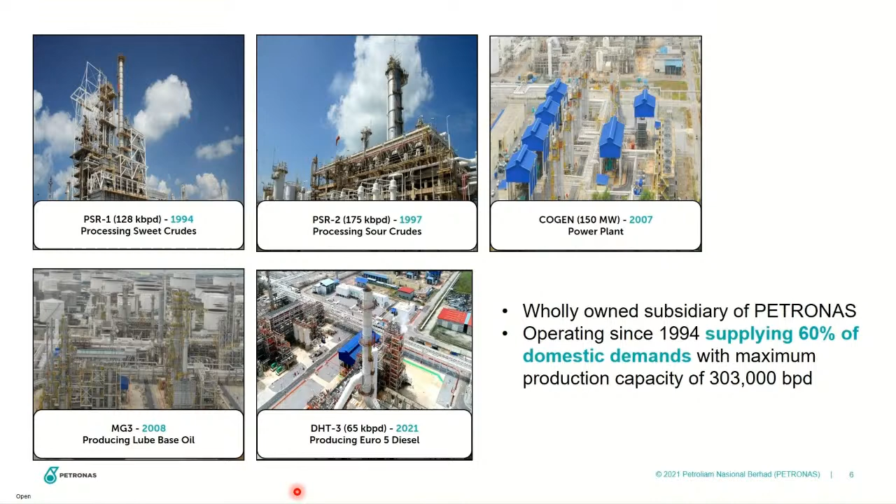The latest addition that we have in our complex is Diesel Hydrotreater Unit DHT3, which started commission this year specifically to process diesel Euro 5. These units are all interconnected and integrated between each other with shared common facilities such as hydrogen supply, fuel gas, utilities, and tanks. The movements of the hydrocarbon molecules across these units are continuous 24/7, and the movement also needs to be tracked.

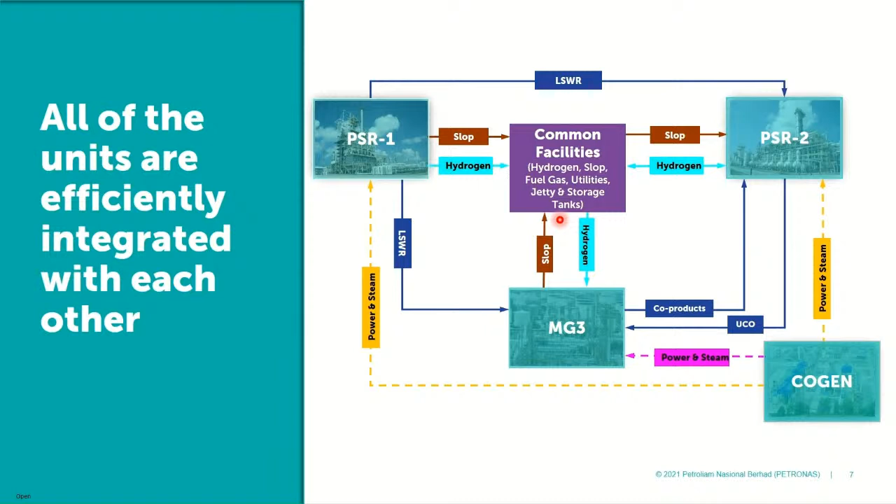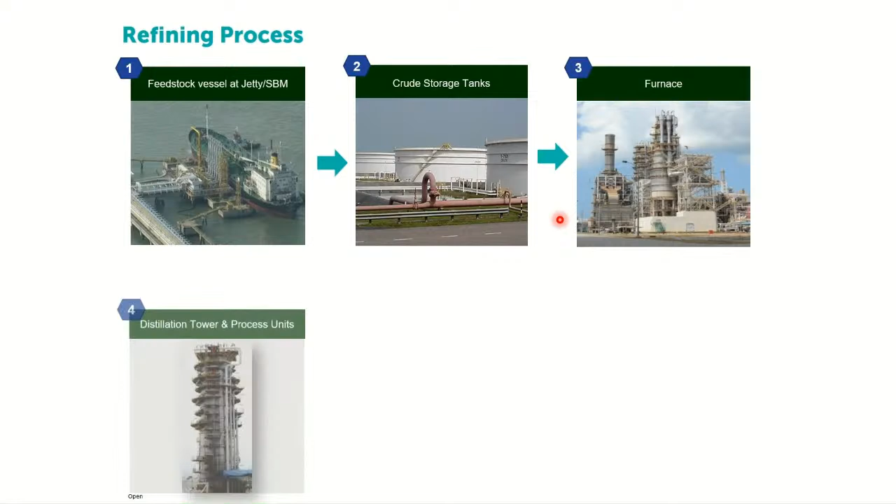So Sigmafine covers the boundary of our refining process starting from, first, the delivery of feedstock at jetty. Secondly, in and out movement of crude at tanks. Third, the movement of molecules from processing units into tanks. Next, in and out movement of final product tanks. And lastly, delivery of our products through the 3 modes of distribution, which are vessel, pipeline, and truck.

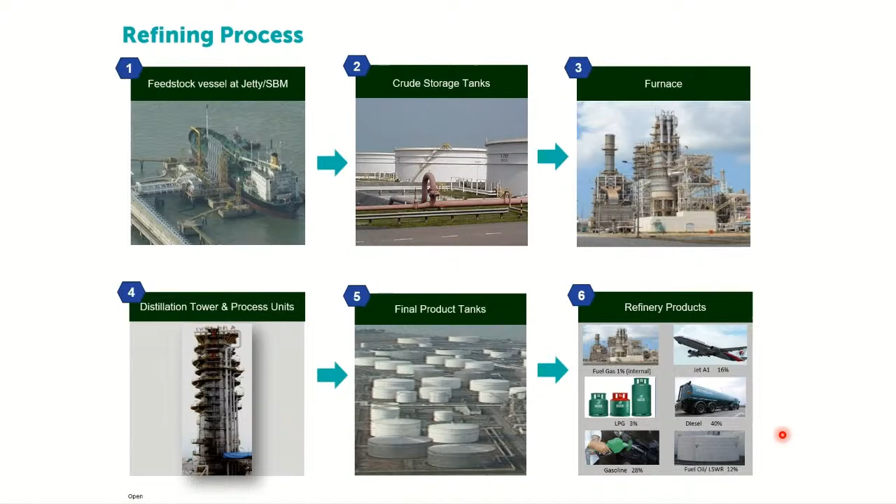In total, Sigmafine is able to provide reconciliation of 124 tank mass balance with an average number of 4,100 to 4,600 tank movements in 1 month. Now, moving on to the function of Sigmafine as a solution in helping our organization to improve our reliability of data ecosystem.

So before Sigmafine came into the picture, everything had to be configured manually through Excel spreadsheet. This definitely imposed difficulty when it came to balancing refinery data, as the hydrocarbon accounting team needed to rely on manual data entry and consolidation. And with manual input of data, the team also had difficulty in accessing historical data when needed. There was no systematic data architecture or system that was able to capture the data activity, tank inventory, and movements across the refinery units in real-time tracking. This also greatly increased the possibility of error.

Besides that, the team would face constraints in adhering to the deadline of our end-of-month account closure, which is on the third day of every month, from having to go through various sources of data. Therefore, this called for a seamless system that can act as a main platform to consolidate and collect all this data and can be accessed by the hydrocarbon accounting team. And this is where Sigmafine steps in to play its role by compiling and organizing data efficiently to allow simplicity for its end users in accessing data whenever and wherever.

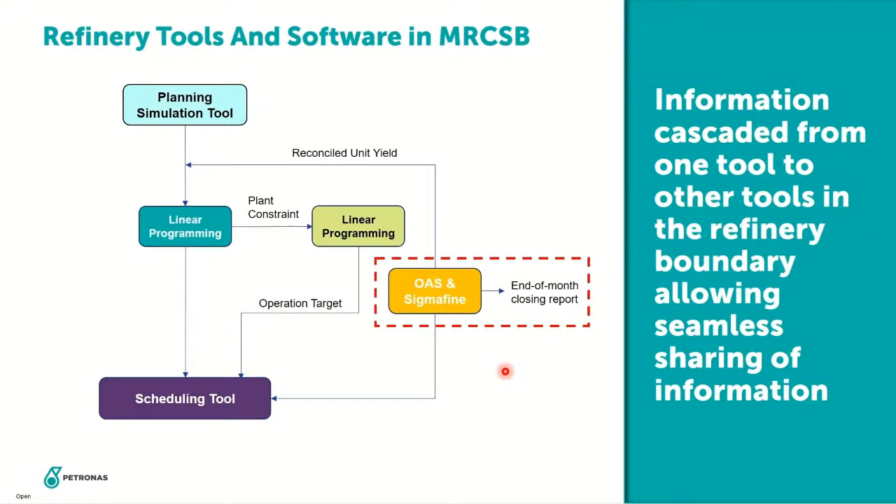So using Sigmafine, our user experience can be divided into two categories, which are daily and monthly. On a daily basis, we are able to produce two main reports, the mass balance and envelope reports. Through these reports, we track hydrocarbon movement across the multiple units in our refinery.

Secondly, we are also able to produce water draw reporting using Sigmafine by tracking the volume of water being drawn from our crude delivery. Through this monitoring, we are capable to detect if there is an unusual amount of water drawn, which may compromise the quality of our crude that will be used for processing.

On a monthly basis, we have the Inventory Movement Report, or IMR for short, which consists of monthly reporting of tank inventory to determine the performance of three main units in MRCSB. Lastly, we have the Unit Throughput Report, which is used for financial purposes.

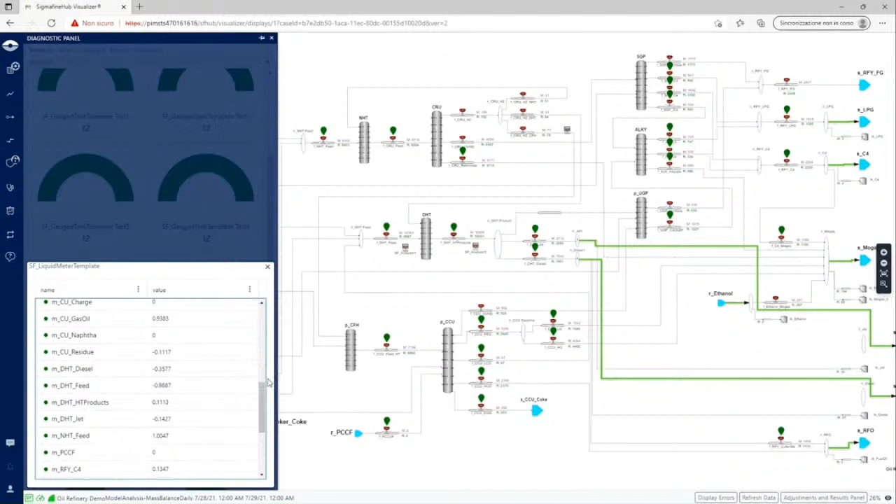It is not new that Sigmafine provides a set of statistical indicators that helps you in analyzing your data for the diagnostic. But then you have to dedicate some time in realizing where the issue is, which data is missing, and most important, how to solve. Thanks to the Sigmafine Hub web app, you have now the power to develop some logic through the usage of the Studio Analytic that supports your manual routines during all the process of data validation.

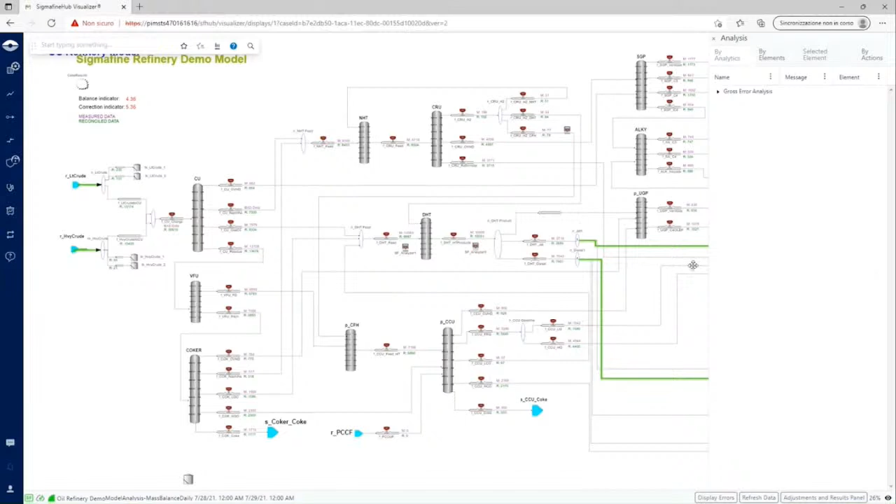Let's consider a very common situation that I'm pretty sure can sound familiar to you. It may happen that some measurements in your site, for many reasons, return 0 or bad data. Now, imagine how useful it can be to have your analytic that returns the list of these measurements along your model in a sort of interactive summary table, and then make a comparison with their values in the previous case, with no need to spend time in closing the current case, opening the previous one, and manually searching for the values you are interested in.

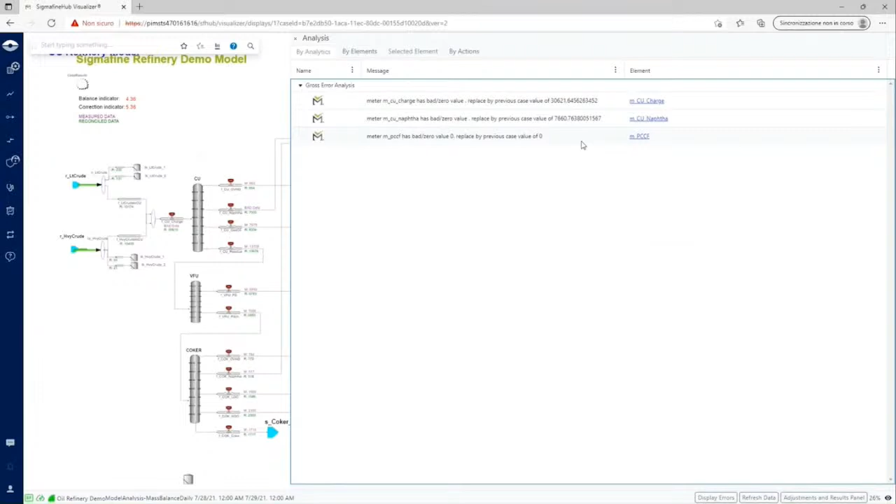Also, it would be incredibly advantageous to have some suggestions on the possible actions to take in order to solve the situation, for example, by adjusting the current value with the previous. And you can easily decide which actions to apply or not.

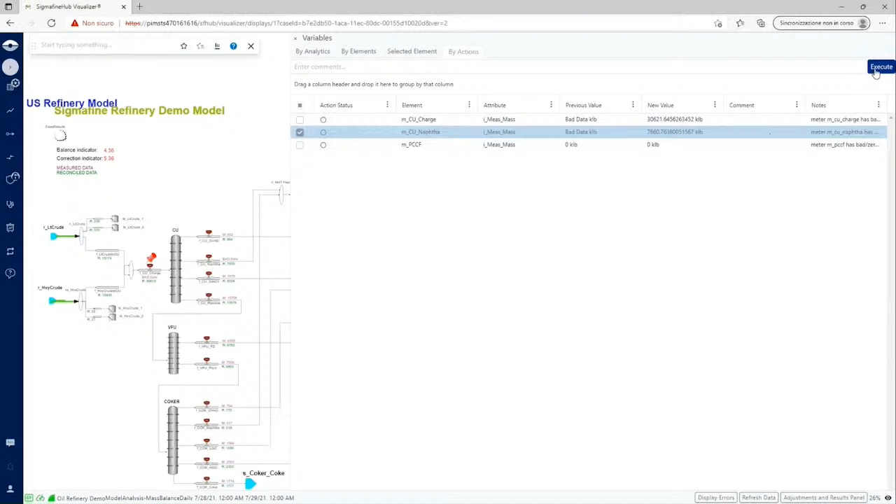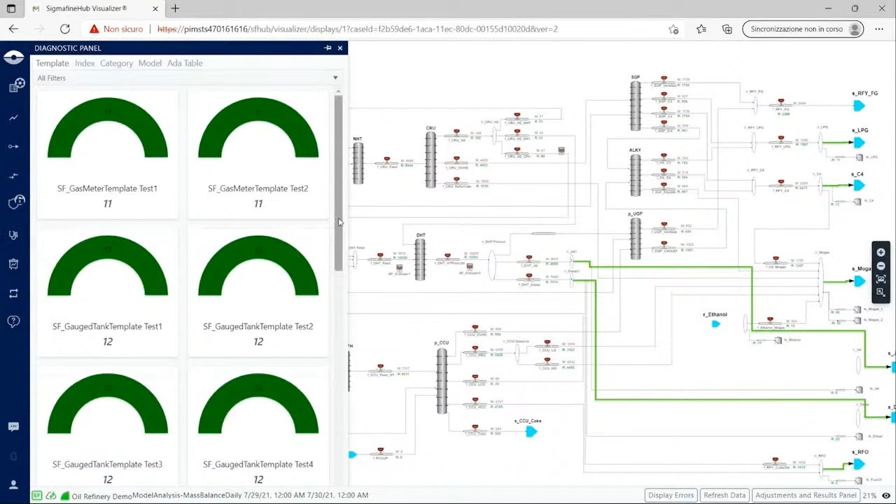Another common situation happens when you are analyzing your dataset and you notice a node, a tank, or process unit with a huge imbalance. You can start analyzing your data using the Diagnostic Panel inside the Sigmafine Hub. And here you have the overview of all the statistical indicators. You can see that there is already something related to the ethanol receipt area. The meter has a value of test 1 very high.

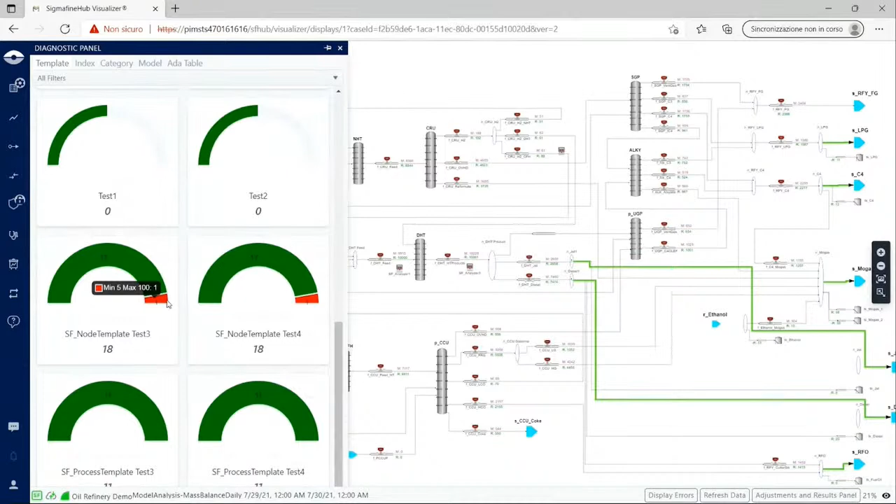This means that the correction applied by Sigmafine to the measured mass is very high with respect to the tolerance that you assign to your meter, as well as you can see the node has a test 3 very high, together with the test 4. These two indicators inform the users that maybe there is a problem in this area.

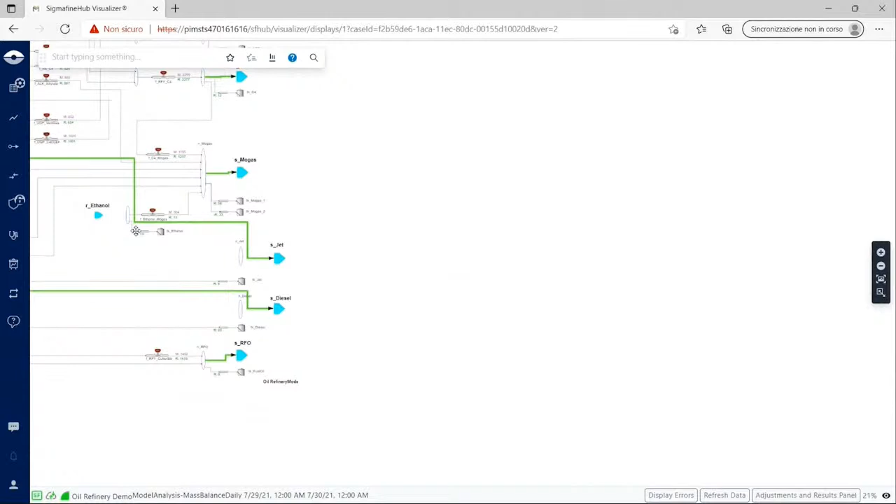But then with the Sigmafine Studio, you can easily decide not only to identify such imbalance points along your model, but also you can associate some suggestions. So you can have here the list of the imbalanced points that you have along your model. In this case, you notice that it's providing you the same information as the diagnostic gave you, but here, in addition, you can associate a suggested action.

So maybe, okay, it tells you that the node ethanol here is imbalanced, but it also tells you that probably there is a missing input transfer. And when you analyze the area, you can notice that a transfer is missing from the receive point to the node. Of course, this information can significantly reduce the time you spend on not only identifying the problem itself, but also the solution to adopt.

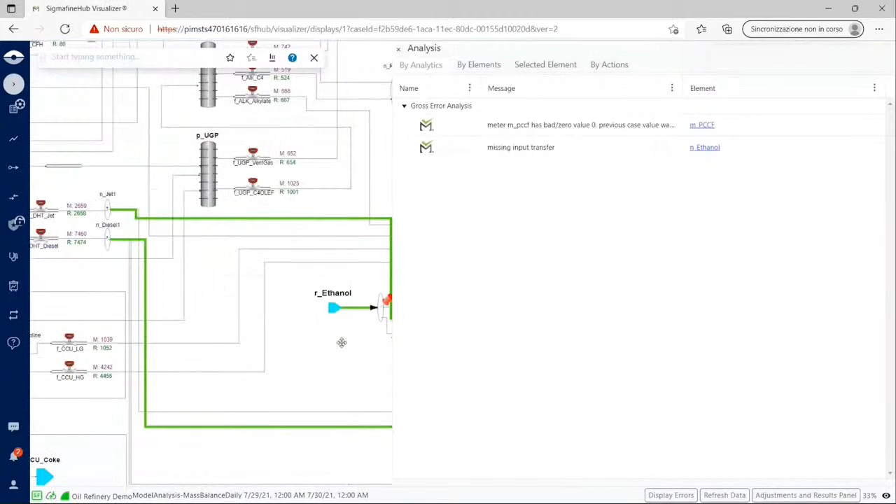In this case, if you click, you can create your missing transfer, putting the source, the destination. You can even add some attributes if you want, or you can just create it. Here it is. The new transfer is now available, also in the model. And now you can run again your case.

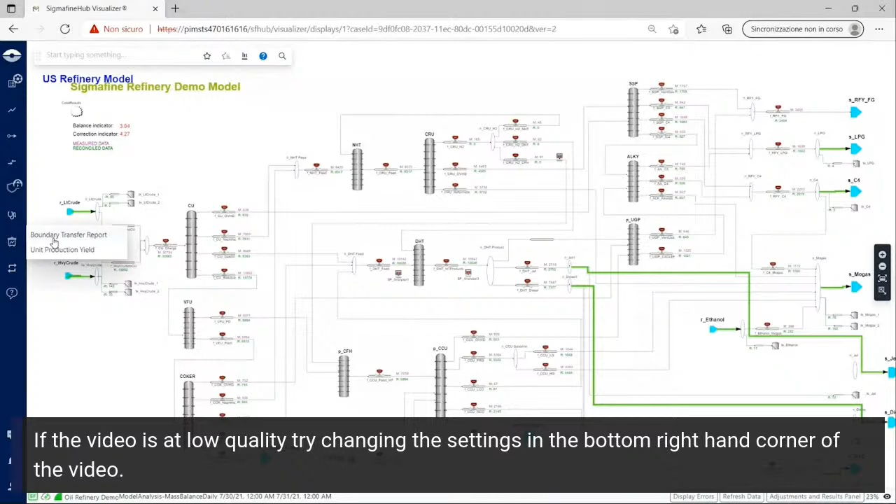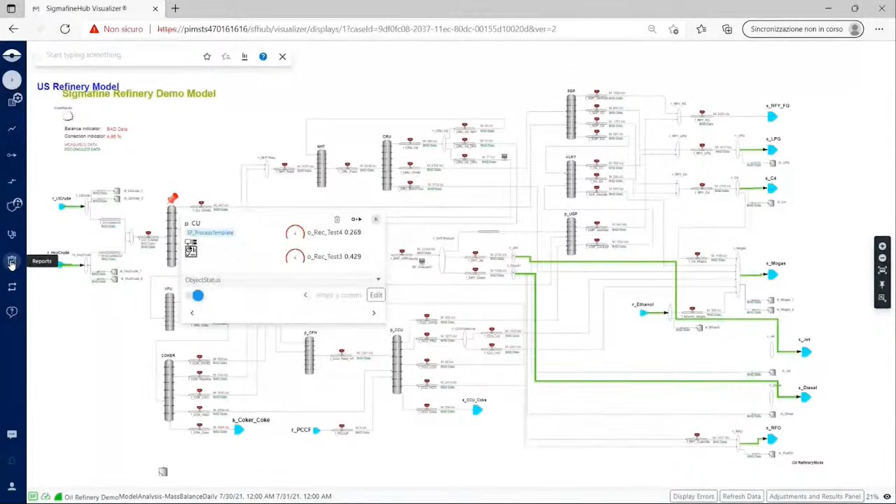Or also, you can monitor the unit production yield, both in tabular and graphical view, in such a way that you can investigate not only the production yield per each unit, simply by dragging and dropping the unit column, so that you can see per each unit the material produced in terms of produced amount, quantity, and yield in percentage, but also the overall productions per material in the graph that you can see here, together with the process unit where they came from.

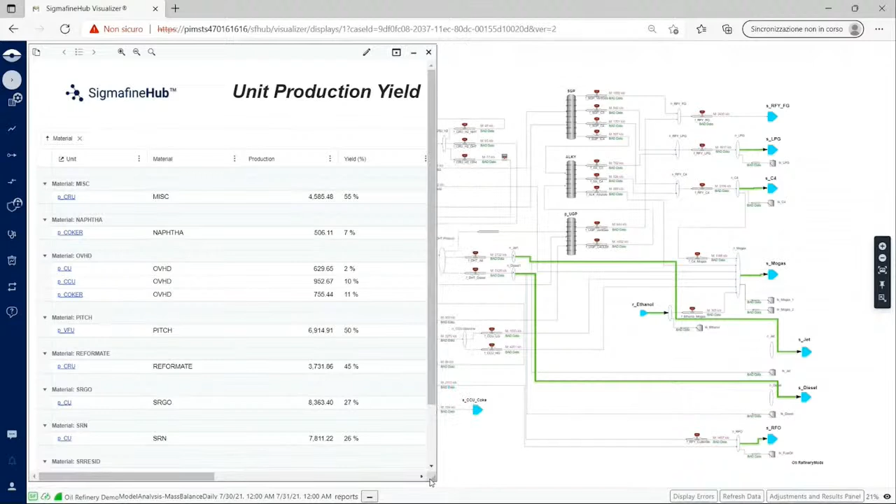For example, you can easily check that the overhead production is done by 3 different process units with their respective quantities. And you can access the same information also from here by grouping by material and searching for the material you are interested in. Furthermore, you can decide to go more in detail for the single unit and to select your desired unit and then open a more detailed view.

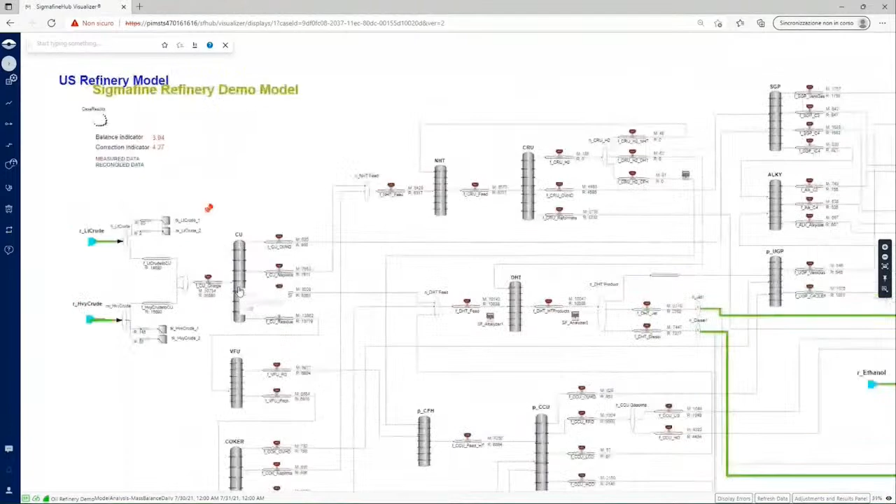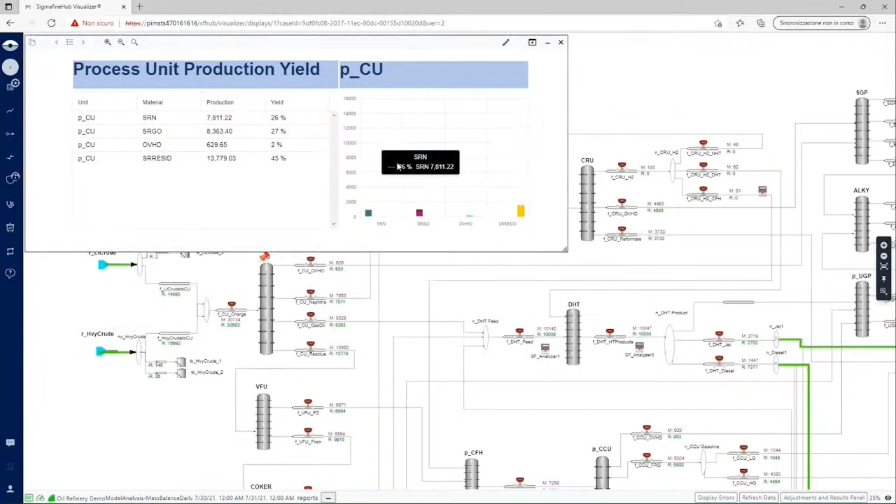And if you want to go more in detail with the unit production yield, you can even select the unit you are interested in and access the same information, but filtered only for the unit that you select, so that you can see here in graphical and in tabular view the yield of the crude unit referred to the material produced by the unit, their quantity, and their yield in percentage.

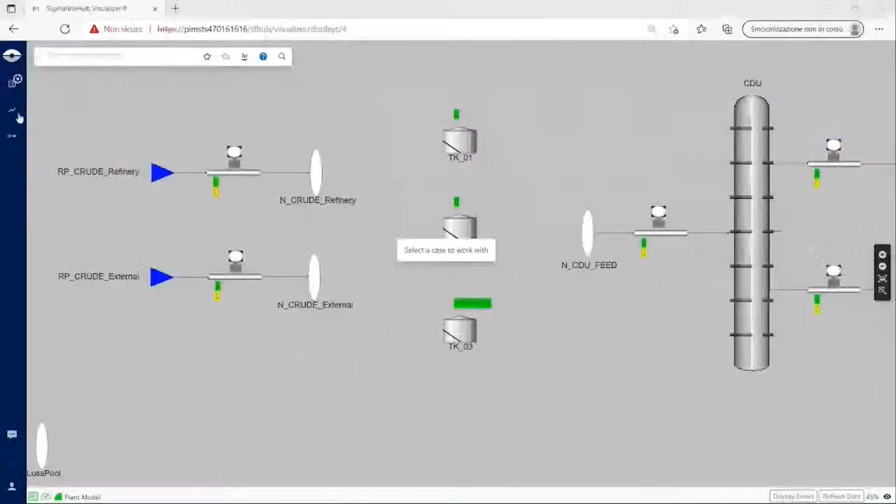Till now, I showed you examples that apply to the balance analysis. But of course, the Sigmafine Studio supports even more advanced calculations. For instance, let's consider a composition tracking analysis that calculates the material composition of tanks, nodes and transfers based on their initial composition and the movements that happen during the analysis time frame.

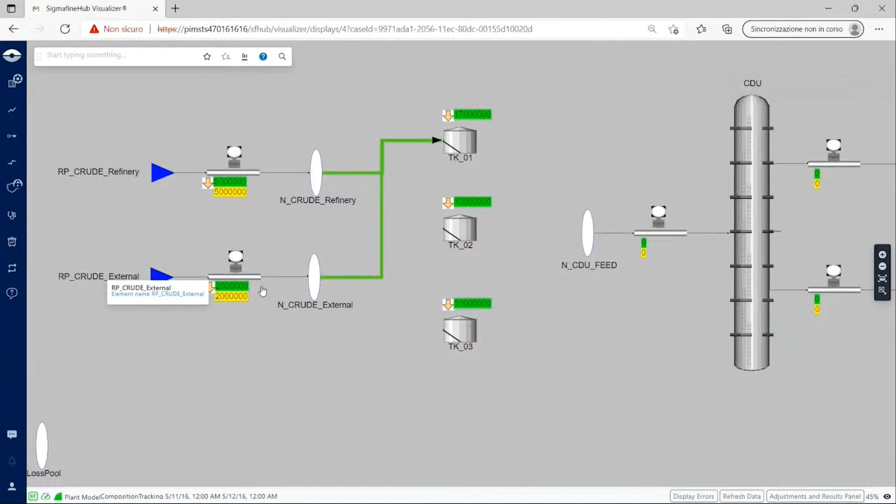Thanks to the Sigmafine Studio, you can create an effective way to visualize and analyze the composition data of an element, for example, this tank, together with the material balance data within the same interactive dashboard. So you can have a complete overview of both the balance and the material composition, in terms of what enters the tank, the transfers that enter, and the material detail. So at the end, you can access all this information, and the composition tracking table results are visualized through a pie graph that updates according to the selected elements.

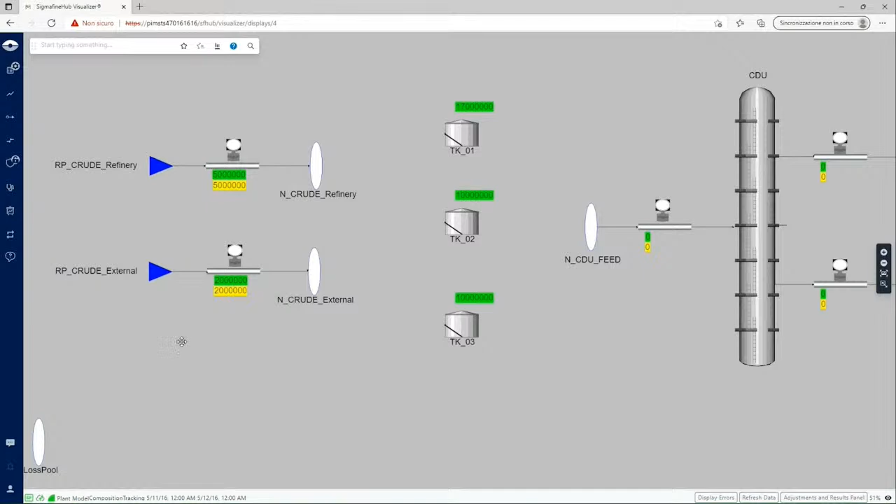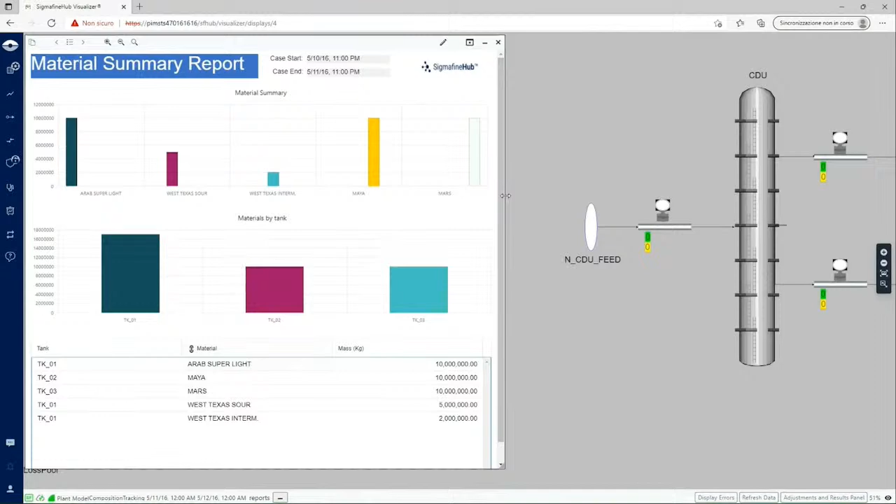It's really amazing what Sigmafine Studio is enabling. Elena showed us analytics that help users not only to root cause the problem, but even propose solutions. Interactive reports that provide insights on the assets and on the overall balance envelope. Dashboards that interpret complex datasets, such as contextualizing the results of composition tracking. And everything available at your fingertips without stepping out of the visualizer, so that you can immediately take actions, and that is really awesome. But there is more.

I'm pretty sure, whilst looking at the demo, that in your mind you were already thinking about what you could do if Studio were available in your Sigmafine environment right now. Well, you could say, I could create the refinery loss report. I could see all the metal grades of each stockpile all at once. I could compare in one table the LNG production of all my trains.

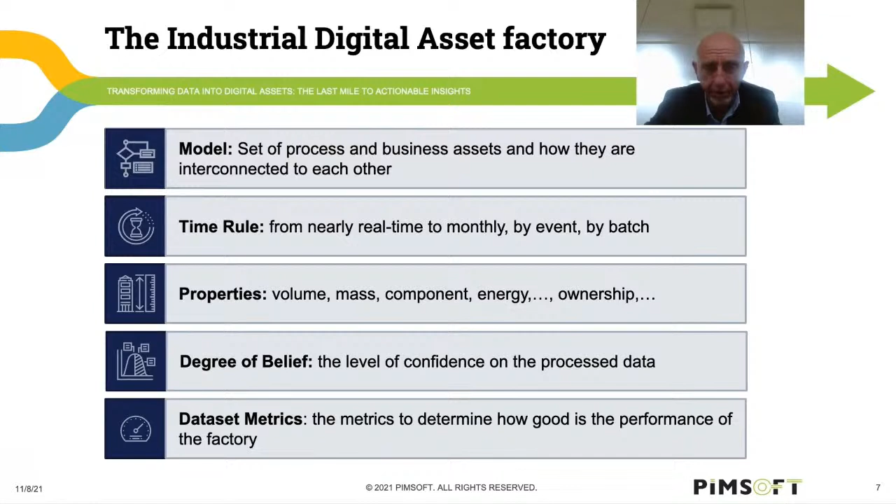So in order to process our data, we need to implement and execute a certain set of data operations. And some of them are quite simple and intuitive, like filtering bad data, validating the data against certain criteria, and then maybe we would like to also implement certain rules to replace and substitute such data with alternate values like design data or recommended data.

Then we have to reconcile such data according to the constraints, the principles and the properties we selected. So we may want to reconcile based on mass and energy, and we may want to apply this constraint on different envelopes. And the result of the reconciliation will be to obtain a first level of dataset able to close the balance around the envelopes we selected.

And then also thanks to that reconciliation, we can even infer data we were not able to measure because of lack of instrumentation in the field, or because certain data was not actually possible to measure. And finally, based on this dataset, we may want to build some tracking capabilities in order to track properties like composition or, as we said, ownership.

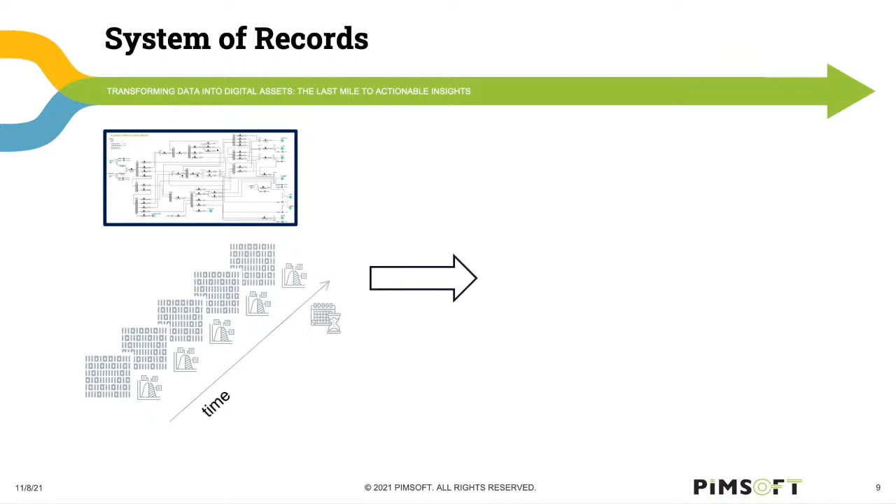The execution of the data transformation steps around the model generates over time the sequence of industrial datasets together with their metrics. This is what has been defined as the single version of the truth. We prefer to refer to it as the system of record of the company, embedding the accurate description of the properties related to the company assets over time.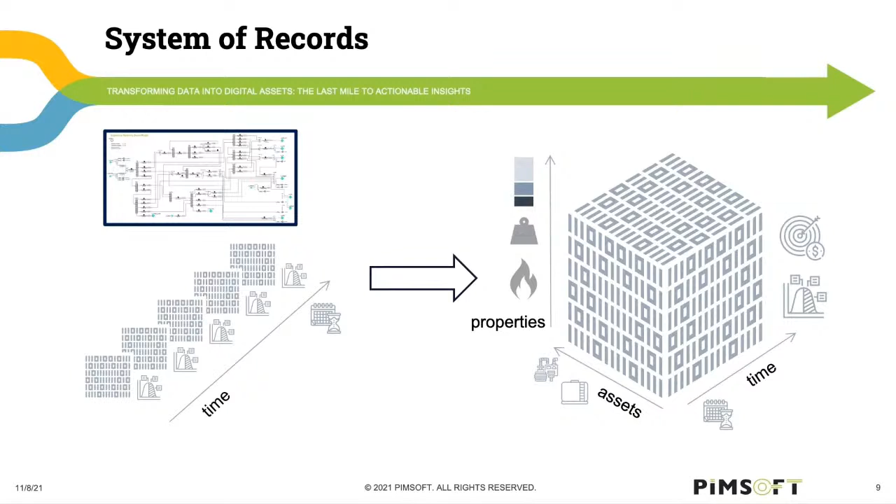The last step of the data transformation journey is about shaping. Most consumers will not be able to digest the dataset as it is. So our factory needs to be able to shape and augment the dataset in order for it to be consumed by different actors. Many scenarios see Sigmafine feeding finance with generated production and consumption data to move ERP stocks,

sending yield reconciled data back to scheduling, preparing a compliance report for tax and environmental authorities, and finally, more in general, reshaping the dataset to be consumed by the advanced analytics and machine learning application layer. In all cases, it is extremely relevant to provide a metric certifying that the level of reliability of the dataset is good enough.

Being able to measure the industrial dataset means being able to certify the reliability of the data delivered to the different consumers. It is also a means to keep our digital asset factory under control. Sigmafine produces a certain set of indicators. Some of them are related to the model, others are related to the points of measurement and points of balance within the model itself. They segment the performance of the factory across different perspectives. You can see we have redundancy, imbalances, correction, solvability, and so on.

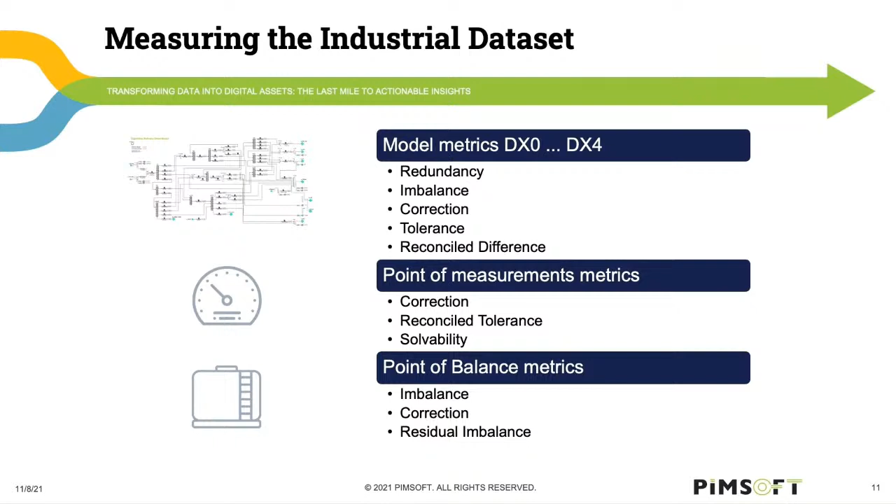A first example of model metrics is coming from MOL. MOL is an integrated oil and gas corporation. They are tracking and historicizing the Sigmafine generated model metrics in their PI system. In such a way, they can track historically the performance of their industrial dataset factory, and they can assess how modifications to the models or improvements in the measurement base can affect the performance of the Sigmafine process.

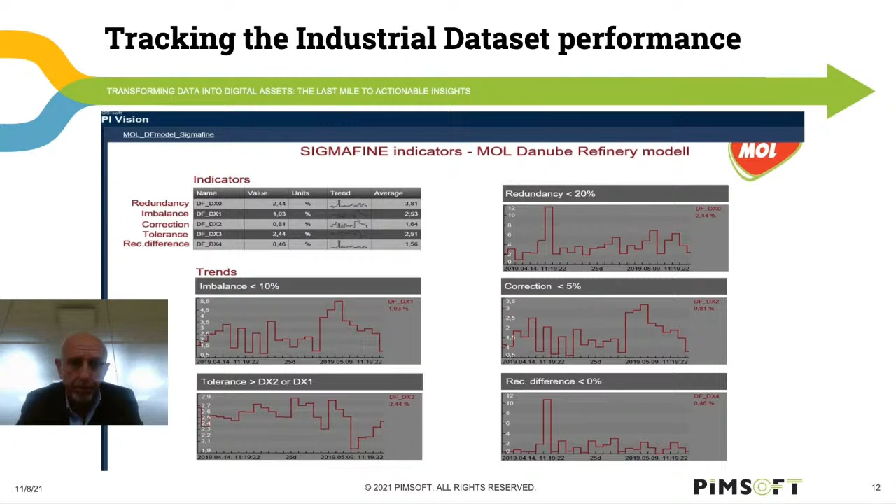Another example of usage of such indicators is coming from Slovnaft, a large refinery located in Slovakia. Slovnaft is tracking Sigmafine test 1 values. Those are the indicators related to the correction applied to the points of measurement in the model. And by monitoring this correction indicator, they are able to identify suspicious meters, and so even trigger a maintenance action to the maintenance department.

So we have discussed how to manage and measure industrial digital assets, and now we'll go through monetization. Infonomics defines monetization according to two main categories, indirect and direct. Indirect monetization refers to the internal usage of digital assets in order to drive better business, process, and organizational decision-making, which ultimately drive better economics. This could be the case, for example, of advanced analytics, optimizing certain internal processes based on reliable datasets.

Instead, direct monetization refers to the exchange of digital assets with external entities or consumers as the base to obtain an economic return or avoid a financial loss. But let's map this concept to the industrial digital asset context. With regards to external monetization, we have several cases where Sigmafine-generated datasets are used in the relationship with third parties. This is done, for example, in compliance, whenever validated datasets are required by tax and environmental authorities.

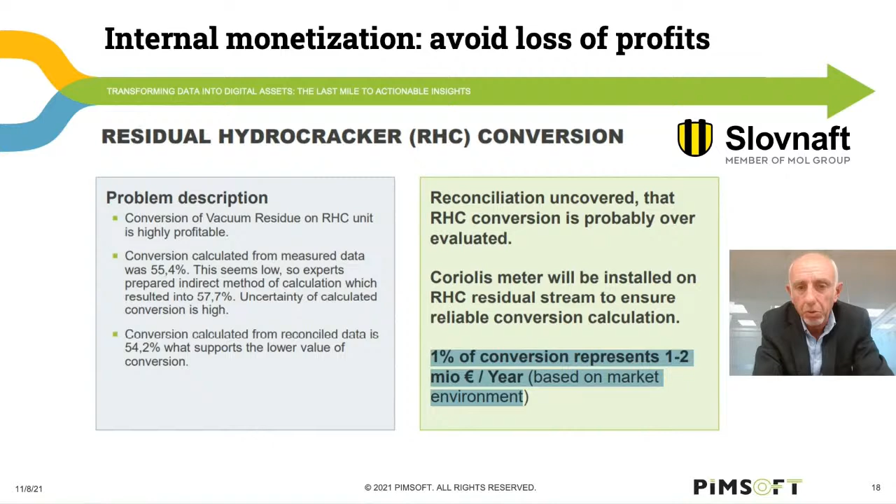We went through the process of managing, measuring, and monetizing industrial digital assets. In Pimsoft, we believe Sigmafine Hub is the foundation to elevate such process to be a well-controlled industrial dataset factory. And among the different system capabilities added by Sigmafine Hub, I would like to underline the ones I believe are the most impacting. First of all, Sigmafine Hub introduces the capability to augment the knowledge of the system itself. It is possible, therefore, to add specific rules and behaviors to build a shared company data management practice.

Second, we learned from our customers that this process is the result of a team effort, where different roles cooperate. So improved collaboration supports the capability to communicate and share data and actions among the different members of the team.

Also, Sigmafine Hub provides an enhanced workflow management where to configure the data transformation and shaping steps specific to your company. And finally, the auditing capabilities have been enhanced to span both changes to the data and changes to the configuration to be tracked and available for both internal and external audits.

We want to demonstrate the interoperability of Sigmafine Hub applications, which is their ability to use the same features available from the visualizer display, even using a different data rendering mechanism, which in our case is a report. Here you can see a display which also has a report that I have activated from the command bar of the visualizer. The report shows the meters test 1 performance indicator, providing a graphical and tabular view of our information, allowing us to interact with the display.

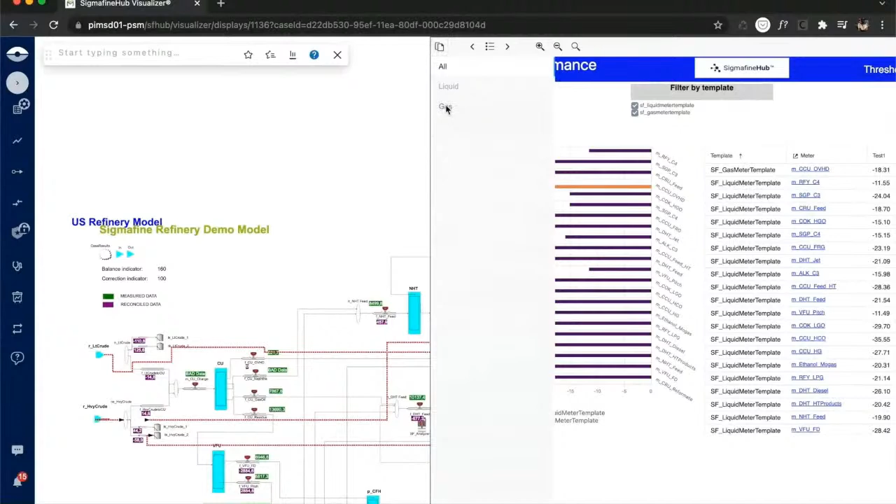The report gives us standard filtering options on the meter template, as well as the possibility to organize our data into multiple pages. Using only the report, we have all the full options, such as navigating on the display elements, viewing information contained in their attributes, and even more, we can adjust attribute values through the attribute panel.

The Sigmafine case runner is also available to run the reconciliation. As you can see, as a result of changes on the Sigmafine case, the report data is not valid. The notification message is reminding me that I must refresh the data. In future releases, a setting will be made available to allow automatic data updating.

To wrap things up, we can say that with Sigmafine Hub, we have the advantage of being able to work using our preferred approach without losing the functions that are available on the system, as well as exploiting the interoperability between the applications themselves. But how easy is it to use the new applications? Let's see in this second video.

The scope of this video is to demonstrate how easy it is to modify a report or a dashboard, taking advantage of the integration between the report and the report editor, allowing us to make the desired changes and immediately evaluate the results. By opening a report from the visualizer, we can activate the report editor to make graphical changes. The report editor opens, and then we can modify the report by adding a new content that is a data grid, and then assign a data source from which to pull the data.

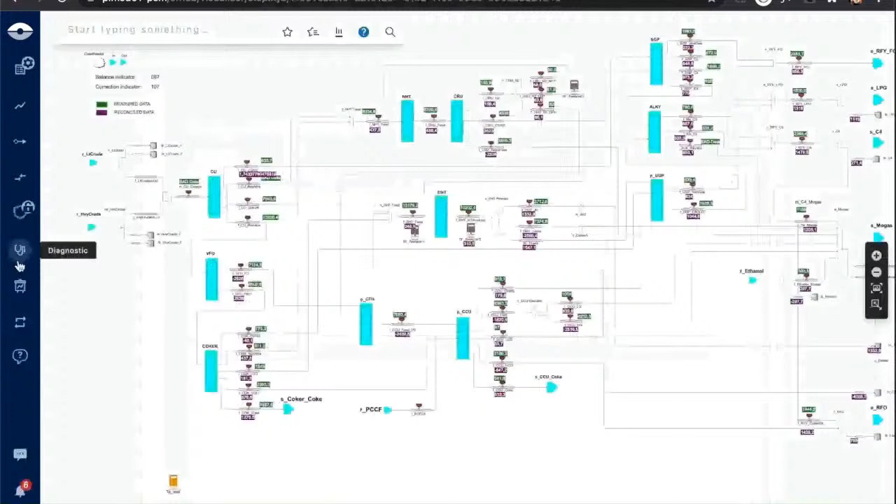Finally, we create a relation between the data grid and the chart using the material in order to set up an animation when the users click on a material code. As a final step, we have to save the report by assigning a name. In order to make our report available in the Visualizer application, we need to configure the new report in our display settings. As you can see, the report is now available in the Visualizer command bar, and we can open it to see our material stock.

So far it looks good, but what's next? Let's look 1 year ahead and see the next evolution of the SF Hub platform. End of next year, we expect to extend Visualizer web app with authoring capabilities and to release one new major feature, Studio Workflow. The introduction of authoring will allow to create and modify displays in a synchronized way with the database, allowing users to discontinue ProcessBook, the current authoring tool. Remember, discontinuing ProcessBook is not a requirement but an option.

The introduction of authoring will also require the deployment of a first version of a new service, SF Hub Server. The service will master and coordinate access to authoring resources and to the database. But there is more. By the end of 2022, early 2023, the release of a new Studio component, the Workflow, is also planned. Workflow introduces a new way to use and work with Sigmafine, moving from an application-centric to a process-centric approach, transforming Sigmafine from a set of independent applications to a documented, coordinated, and audited bus of applications and services.

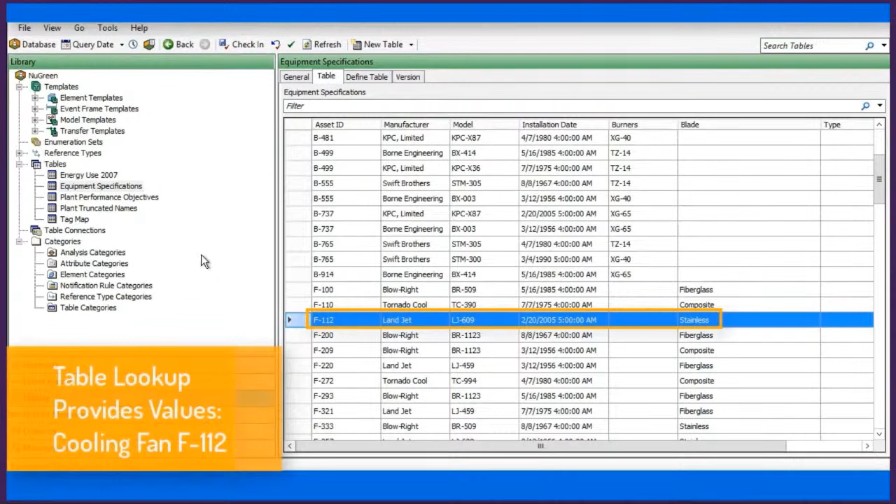It's also easy to create tables with your asset metadata. And AF can import and link with tables you already maintain to ensure all asset metadata is kept up to date. Grouping all asset data together creates a holistic view of your PI System, while eliminating issues with finding your data through esoteric tag naming conventions. Okay, we organize our assets. What else can we do?

Arguably the most powerful feature of Asset Framework is the ability to create templates. Making a cookie-cutter model for repeatable assets makes it incredibly easy to scale. Scaling is essential while your company is adding equipment like a new turbine at a plant, creating another production line, or adding an entirely new site, as you need to easily standardize your operations. Templates will streamline the build-out of your existing or new systems, and as you get more advanced with template design, you'll be able to create layouts that can apply to several types of equipment, or even model out your entire process from start to finish.

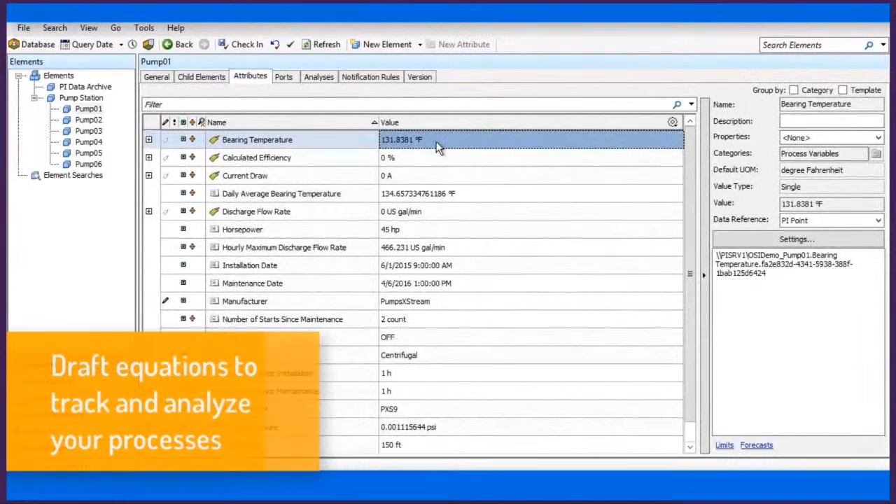Once you've organized your assets in an intuitive way, it's time to get more out of your PI points. Explore and manipulate your data with our Asset Analytics engine built into AF. Configure predictive models to set targets for your processes, write equations to increase your understanding, or compare roll-up analyses to investigate which equipment or site is succeeding more than the rest. Leverage your metadata to see trends you may not have had insight into before. The possibilities are endless and configuration is straightforward.

Yet another addition to Asset Framework's suite of features is the ability to capture events that happen throughout your operations and notify your personnel when necessary. Event frames allow you to track individual shifts, batches, or process excursions, while notifications can alert an engineer prior to a failure or be used to send out a summary report on a scheduled basis.

Tracking events is crucial to optimizing your process and will help to identify areas to improve your production. Notifications make sure you don't need to worry about your operations, since PI will be able to communicate any problems to you and your team the second things are out of place.

With Asset Framework, you're gearing up for the full extent of the PI System. Many of our visualization and data shaping tools leverage Asset Framework to give you better intuition about your data. PI Vision, PI DataLink, PI ProcessBook, and our PI Integrators rely on AF to provide you with a simple and intuitive way to interact with your processes.

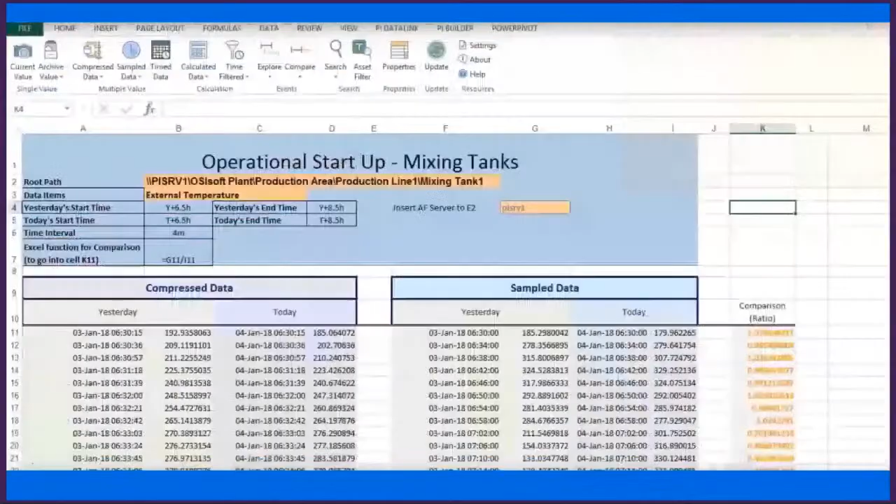Live troubleshooting, writing repeatable reports, or sifting through huge amounts of data becomes much simpler with Asset Framework as your backbone. Additionally, AF provides a whole new way for you as developers to interact with PI. We encourage you to leverage the AF SDK to build applications that fit your needs.

Asset Framework organizes your data and metadata, helps you scale, analyze, and track your processes, and provides you with an intuitive window into your operations. Asset Framework is the key to unlocking the full value of your PI System.

I believe now you have seen the main capabilities of the PI Server and especially the PI Asset Framework. Every one of our customers has access to all of these features within the PI Server without having to pay more. We don't sell these capabilities separately, and therefore with just one purchase, you can start working with them right away.

For the third layer, it is about delivering data to users. We have out-of-the-box tools that are easy to use. You don't need any programming skill for any of these tools. You have seen a sneak peek in the video just now, but let's talk a little bit more about them.

First, we have PI Vision, a web-based application that allows users to build dashboards and view them from any device. With web access, a field operator can see real-time updates even when they work outside of the business network. Also, PI Vision is so easy to use that you don't even need to see the manual to start using it.

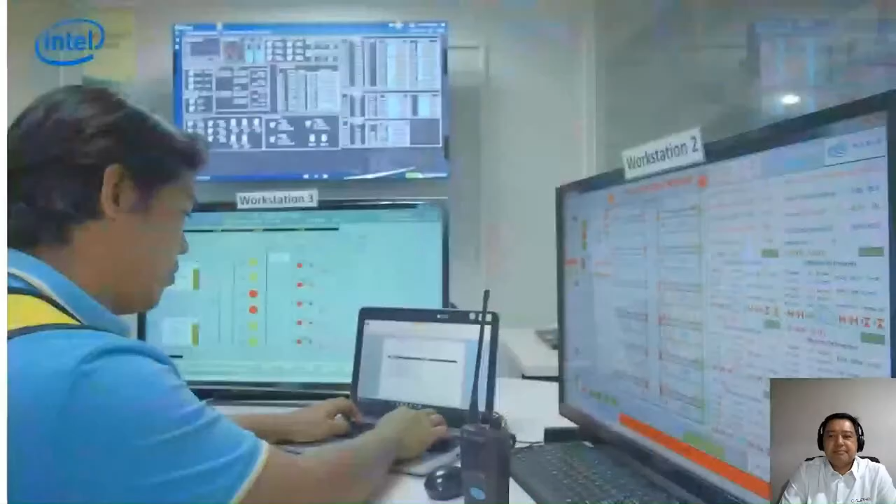The solution improved Maynilad's business by giving them an overall look into their entire operations. So if they had 20 to 25 systems before, they have just one monitoring system today, and that's the OSIsoft PI System. The solution deployed follows the pillars of IoT: collect, analyze, and act on it. At the heart of it is a data historian, which is a real-time series database. We also have an advanced analytics engine that we use to churn out valuable insight for proactive maintenance. We also create displays for them that follow them on any modern web browser, from desktop, phone, and tablet.

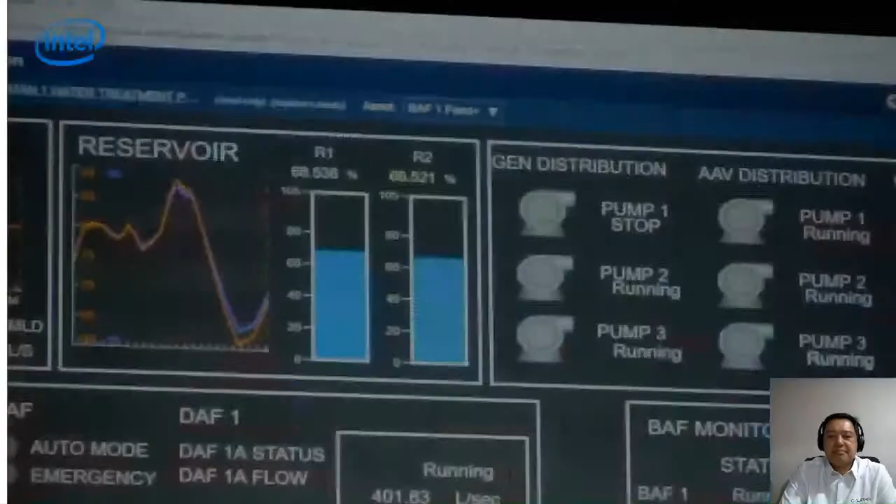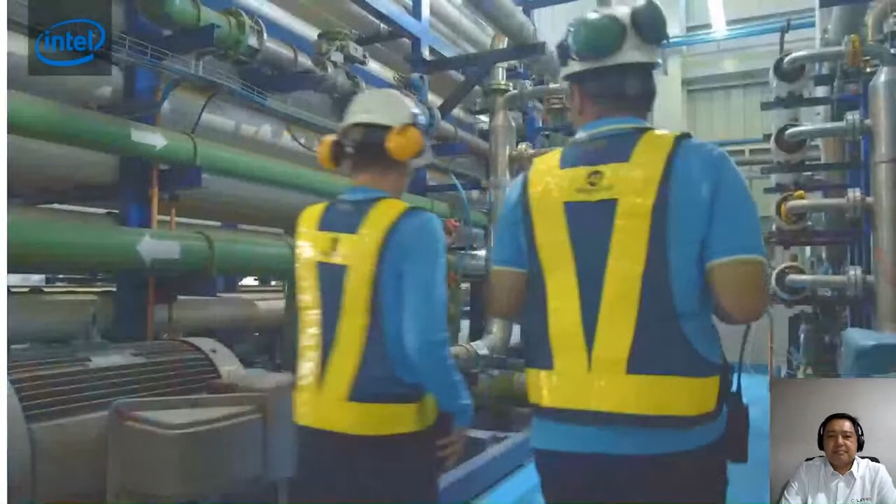Calibr8, we've been working with them from the very start on our IoT platform. They have the technical experience in order to implement, which can be displayed in the central control room. That allows us to be very flexible and to react very fast to disturbances that occur in our network or changing patterns in terms of consumption of water. For example, if there's an area with low water pressure, they can actually ramp up an alternative facility in order to service that area. So those are the kind of things that have benefited Maynilad.

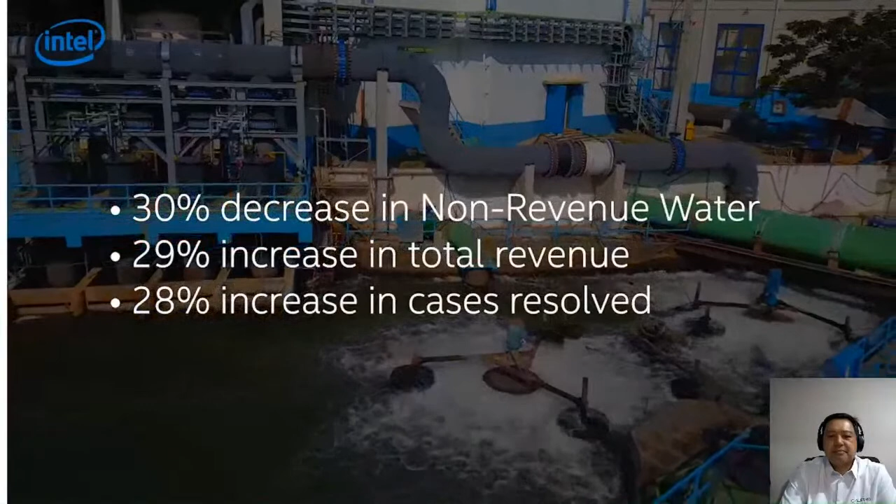So, how do we start? Where do we start? Or what to do first? Those are the common questions that I get from our clients. We work with them. Let's get the data first. Reconcile all the data. Let's optimize. Because if we have a complete set of data, and if we can have that reconciliation of data, then we can quickly optimize. And optimization really means quick wins. And for us, everything starts with data. There should be no excuse in getting that data.

We connect to whatever we can connect to, like PLCs, sensors, and control systems. We collect data from manual loggers, Excel, Google Sheets. We even convert PDF files directly to PI Data Archive, SMS and email to PI Data Archive, and other data sources such as drones and thermal cameras. Because once you put all that data into the PI Server, Sigmafine can really do its work and its magic, because they have pre-built applications and templates that cut across all industry verticals. And all this has been from their experience.

These are models, these are engineering principles, and these are statistical analysis that can be a prelude to your predictive or advanced analytics. So with this, Sigmafine provides us end-to-end value and value to our customers, because now we could really see how we could optimize and save costs.

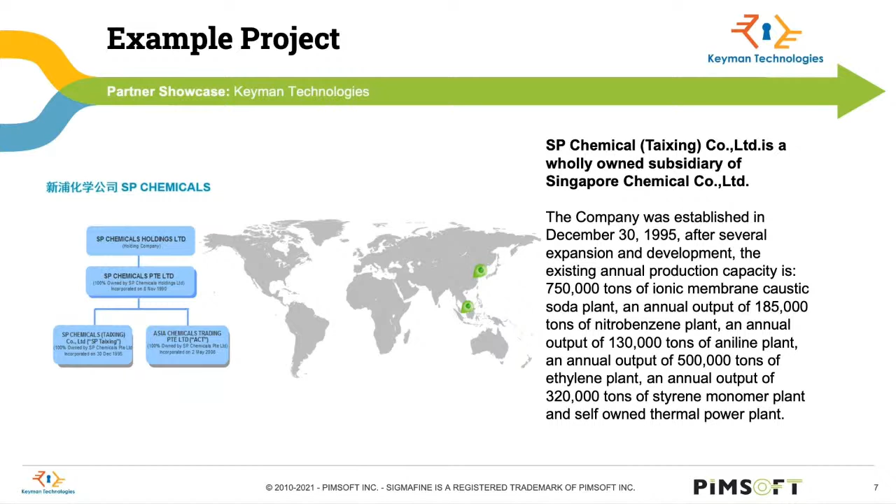So we did a little pilot project for them to calculate the material balance and to identify if there are any data errors in their PI System. Since it's a very big plant, it is very difficult to do everything in one project. So we decided to do a little pilot project for them. Basically, for the pilot project, we wanted to let them understand how Sigmafine works and how it can help them solve their later complex problems.

And we chose to have one facility as the main part of the analytics for this project. So we built one model. The duration is about 3 months, and the model size is 100 elements.

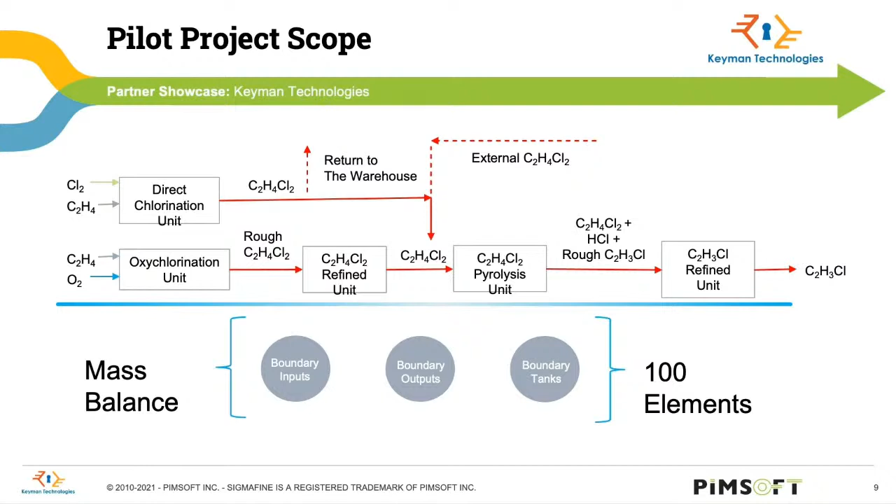So this is a simplified diagram of their process. We worked with the engineers to basically simplify the production process, and we found out what they care about most. So if you look at this diagram, you can see that the inputs are ethylene, chlorine, and oxygen, and the main outputs are vinyl chloride and dichloroethane. So eventually, we defined the pilot project scope, which is material balance within 100 elements with boundary inputs, boundary outputs, and the boundary tanks.

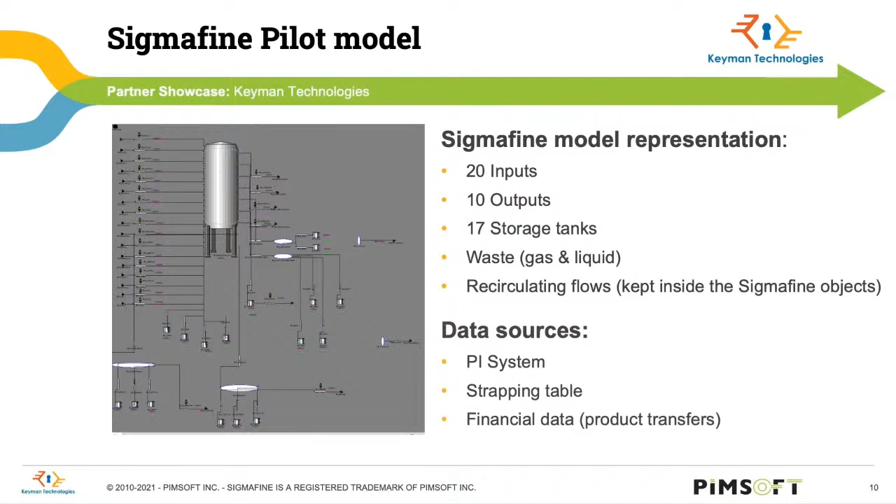So after working with the engineers, we came up with a simplified Sigmafine model. It has 20 inputs, 10 outputs, 17 storage tanks, and some wastes. And the data source actually came from not only the PI system, but also the strapping table and their financial data.

So the results of the pilot project are quite promising. In the first phase, we had the gross error detection. We found an initial imbalance of about 25%, and we checked and modified the model. During the second phase, we found that some of their data were incorrect. The quality of the data needed to be improved. So they went back and changed their meter, which helped us to finally have the imbalance within the 8% acceptance range.

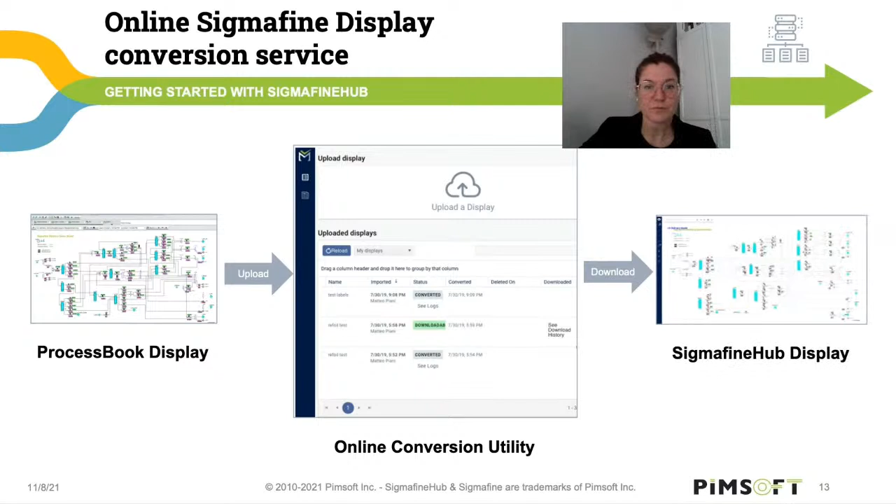Once the displays have been converted and available in Sigmafine Hub, the only missing step is the onboarding of the user. Here are some of the key actions that the user can do with Sigmafine Hub. First, create and manage users using the Sigmafine Hub admin web app. Then, register on the Sigmafine support site. As we said, only users with permission will be able to access Sigmafine Hub and work with models.

They can explore the resources of the Sigmafine support site. They can convert the Sigmafine displays, and after the conversion, the displays can be imported in the new Sigmafine Hub system and used to run the Sigmafine models. All the basic Sigmafine operations, collect element, collect transfer, collect input, run, and publish, will be performed through the visualizer. All the new features of the Sigmafine visualizer will be available, as well as the functionalities and the tricks that can improve the user experience and save time during the balance analysis.

The Sigmafine Hub installation service package allows you to get Sigmafine Hub completely installed by Pimsoft remotely. Even if Sigmafine Hub installation can be easily performed by the customer, you may need to speed up the process. The installation package includes all the installation steps, from the pre-installation assessment to the test of the client connections. Depending on the case, the installation phase can be performed completely by Pimsoft with the customer IT support, or partially by Pimsoft and partially by the customer IT, depending on the permissions that are given to Pimsoft.